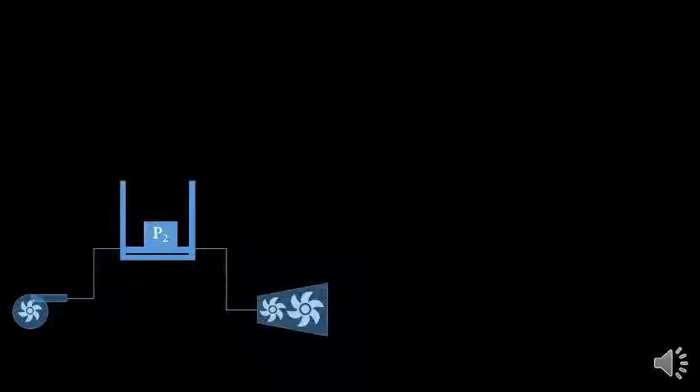Okay, dito meron tayong compressor. Ang compressor natin ay connected sa tinatawag nating combustion chamber kung saan ang pressure dito ay minimaintain natin at some pressure P2. At mula sa combustion chamber, ang hot gas or combustion gases at higher pressure ay ating gamitin upang itulak natin ang mga blades ng ating turbine, and then iikot ang ating turbine.

So mula sa compressor, hihigop tayo ng fresh atmospheric air. I-compress natin ito at higher pressure P2, and then dadalhin natin sa combustion chamber, at doon sa combustion chamber ito ay ating sunugin or initin, of course including with the fuel.

Pansinin natin na nilagyan natin dyan ng piston, ibig sabihin manatiling P2 ang pressure natin dyan, habang ang ating combustion gases ay ini-exhaust natin doon sa ating turbine. So itong mga high pressure gases na mula sa combustion chamber ay siyang maging dahilan sa pag-ikot ng ating turbine. And then ang ating mga exhaust gases ay ititatapon din natin sa surrounding or sa ating paligid.

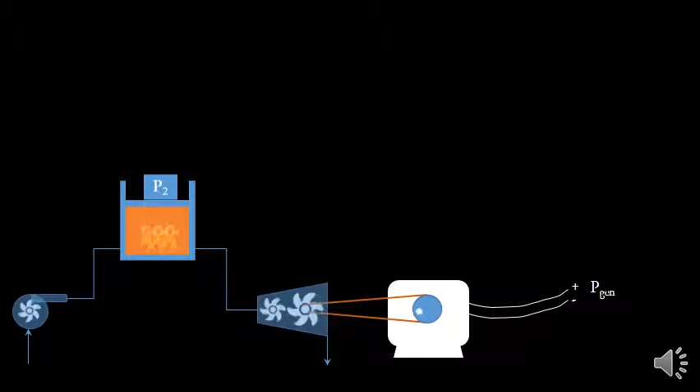Okay, so ang output ng ating turbine ay siyang pwede natin gamitin upang pagganahin ang ating generator. Samantala, ang ating compressor naman ay kukunin natin ang energy na pang-compress mula rin sa ating turbine.

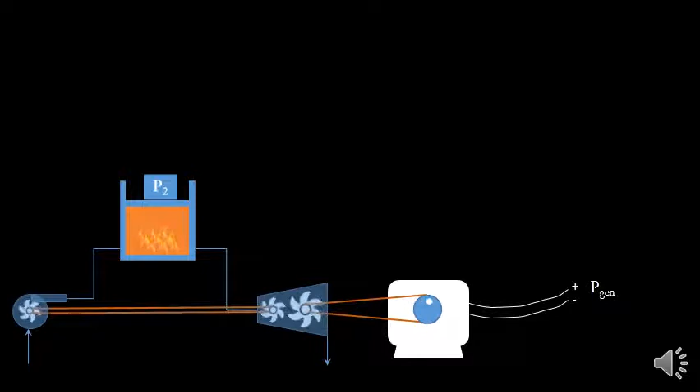Okay, so kapag ang state ng ating air before entering the compressor is state 1, and then ang state nito after the compressor is state 2, and then the state of the air after exiting the combustion chamber is 3, and the state of the flue gas or the exhaust gas is state 4.

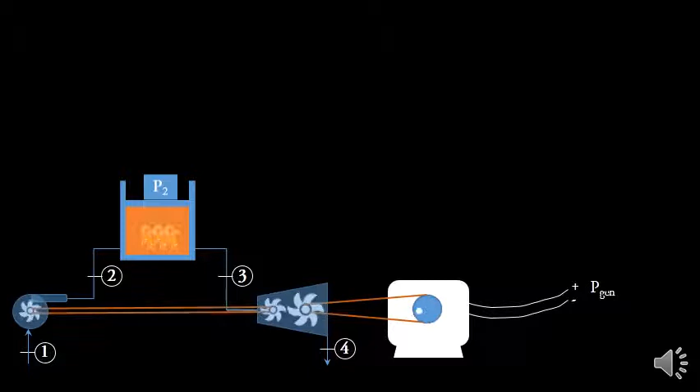So sa TS diagram, ito ang magiging itsura ng ating process. So in TS diagram, state 1 is here. I-compress natin yan sa compressor. Assuming the compressor is working on isentropic process, ibig sabihin constant entropy.

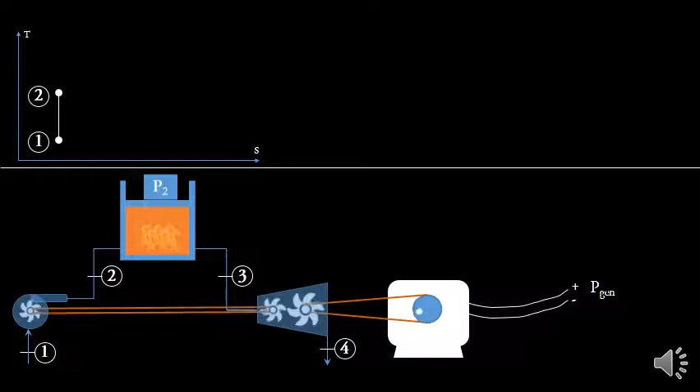Okay, ibig sabihin ng isentropic, ibig sabihin adiabatic ang process, no heat flow, and then it is ideal. So kinupress natin pataas na pressure, that is a constant entropy, meaning that is a vertical line, and then at point 2, mula sa point 2, inilagay natin ito sa combustion chamber at pressure P2 at sinunog natin doon or nilagyan natin ng heat.

So from point 2, ang pressure niya dyan is constant pressure hanggang nagiging point 3. So sa TS diagram, we have 2 and 3 connected by a constant pressure line P2. It is in here that we add heat to the air. And then from state 3 down to state 4, it expands to the turbine at constant entropy.

So our state 4 is here now after exiting the turbine. Okay, dahil ang ating exhaust gas ay tinapon natin sa atmosphere, ibig sabihin ang pressure final ng ating exhaust gas is atmospheric pressure, which is the same pressure of the atmosphere. So pwede natin i-connect ang ating point 1 and point 4 by an imaginary line representing the constant pressure P1.

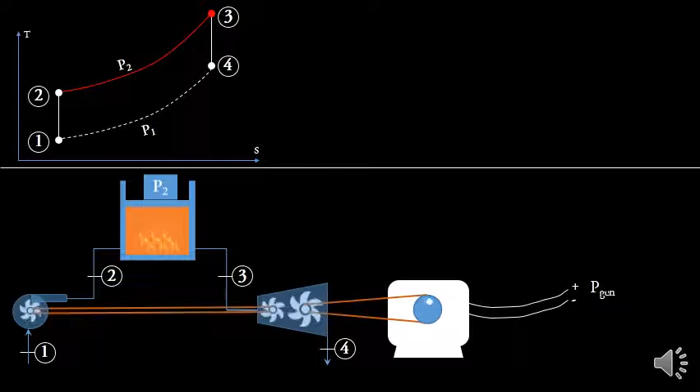So ano ang work done sa compressor? Okay, i-compute muna natin ano ang work dun sa compressor. The compressor works between states 1 and 2. Ang temperature sa point 2 is T2, temperature sa point 1 is T1. At ang total work done ng compressor natin is equal to mCp times T2 minus T1.

Okay, next is sa ating combustion chamber. Sa combustion chamber, meron tayong heat na dinagdag at constant pressure. So, mCp times ang change ng temperature between 2 and 3 is T3 minus T2. And then from 3 to 4, it is the work of the turbine, which is again between 3 and 4, mCp times T3 minus T4.

Okay, I suggest na kapag nagko-compute tayo ng work ng compressor, heat added, and work ng turbine, mas okay na i-express natin ito sa mga positive na value. Ibig kong sabihin, mas okay na ang ating mas mataas na temperature ay unahin natin isulat kasunod naman ng mas maliit na temperature para ito ay maging positive.

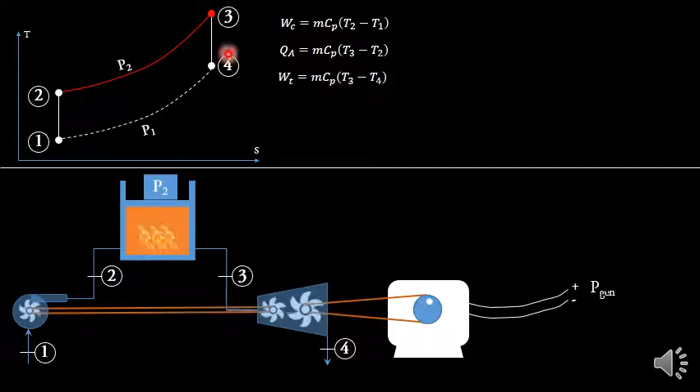Kagaya ng work ng compressor, ang work ng compressor ay nalagay natin T2 less T1. Samantala, sa work ng turbine naman ay biniliktad natin, T3 ang inuna natin and then T4. Although in ordering, supposed to be nauna ang T4. Pero ang gusto natin kasi mangyari, i-compute natin ang positive na work ng turbine. Para ito maging positive, dapat unahin ang T3 sapagkat ang T3 is higher than T4. According dito sa TS diagram natin, kita-kita naman na nasa taas na position ang 3 kaysa 4.

Okay, so kapag i-compute natin kung ano ang net work done natin is the work of the turbine less the work done that is imparted to the compressor. And then, para ma-compute natin ang efficiency, kung gaano nga ba ka-efficient ang ating turbine or ang ating power plant, we compute the work net and then we divide it by the heat added.

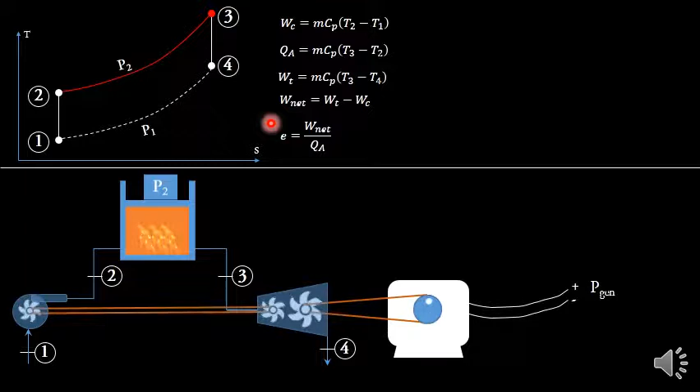Ang formula na ito ay universal or general dahil ginagamit natin yan kahit sa anong mga heat engine. So, base dito, makompute na natin kung ano ang specific formula para sa ating Brayton cycle. So, here,

pwede rin natin i-compute ang efficiency natin gamit ng formula na ito. So, 1 minus 1 over R sub P, where R sub P is the pressure ratio, K minus 1 over K. Where K, if the fluid is air, is 1.4.

And then, we compute the back work ratio. It is important to determine the back work ratio, kasi baka ang work ng compressor ay ganun din ang work ng turbine, so wala tayong net work output niyan, ibig sabihin useless ang plant natin. So, work of the compressor divided by the work of the turbine is called the back work ratio.

Parehas din ito sa back work ratio ng ating steam power plant. Kaya nga lang, sa Brayton or sa gas turbine, ang back work ratio ay hindi hamak na mas malaki kumpara sa back work ratio ng steam turbine. Sa steam power plant, ang back work ratio natin ay napakaliit, siguro less than 1%. Samantala sa ating gas turbine naman, ang back work ratio umaabot ng 50%, meaning kalahati talaga ng output ng ating gas turbine ay napupunta dun sa work ng ating compressor, as much as that amount.

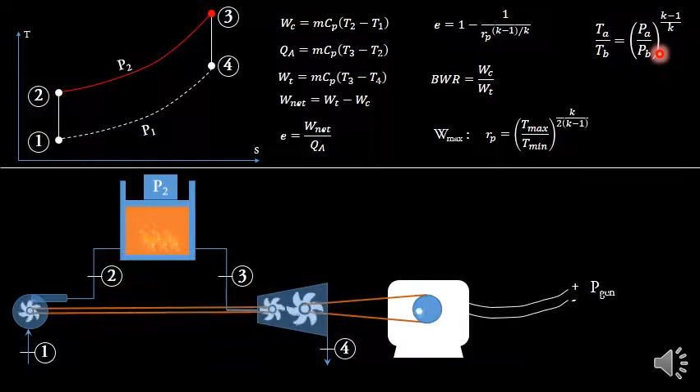And then, don't forget, dito sa ating mga processes, ito ang gagamitin natin na relation ng temperature and pressure. So, para sa isentropic process of compression, ito ang relation ng temperature natin. Okay, that is based on our thermodynamics.

Para makompute natin ang back work ratio, dapat natin munang alamin kung ano ang work ng turbine at ang work ng compressor, at ang ratio nila ay yun ang tinatawag natin na back work ratio. At state 1, ang temperature ng ating air dito and ang pressure ng ating air is that of the atmospheric air. Dito sa problem natin, ang pressure ng ating air is 100 kilopascals, samantala ang temperature is 300 Kelvin.

And then, ibinigay ang ating pressure ratio, which is 10. Ibig sabihin, bago pumasok sa compressor ang ating air, ang pressure nito ay 100. Dapat paglabas nito sa compressor, ang pressure nito is 10 times of the original pressure, so it must be 1,000. And then, the maximum temperature of the cycle is the temperature just before entering the turbine, or just after leaving the combustion chamber, which is 1,400.

Okay, so i-compute na natin ang work ng ating compressor, ang work ng ating turbine, at ang back work ratio. So kapag i-substitute natin ang work of compressor, MCp delta T, at ang work ng turbine, MCp delta T, common ang M at common din ang Cp, so ang magiging matira na lang ay ang mga temperatures natin.

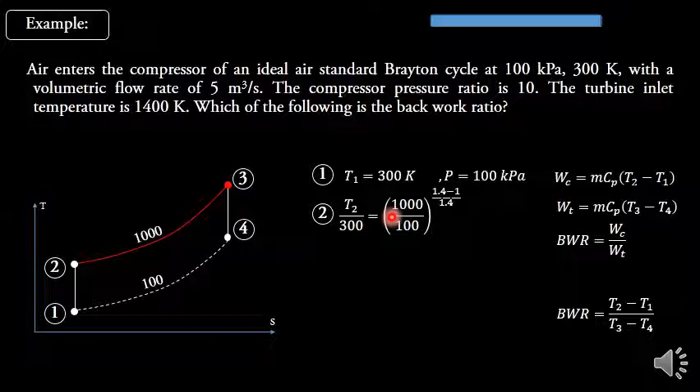Okay, kailan natin gagamitin ang arrangement na ito or yung baliktad na version? Kahit anong version ang gagamitin, ang resulta ng ating computation ay parehas. Pero ang maisuggest ko, kapag meron tayong variable, ilagay natin ito sa exponent. Kaya dito, inalagay natin ang variable sa exponent.

Okay, and that the corresponding pressure for T2 is 1,000. Bakit sa exponent natin ilagay? Dahil kapag ginamitan mo ito ng calculator, madaling i-compute ang T2. So i-compute mo ang value na yan, i-multiply mo ng 300, alam mo na ang T2. Kasi kapag nasa denominator ito, mag-perform ka pa ng cross multiplication or division. At isa pang rason, kapag gumamit ka ng shift-solve function ng calculator, mabilis masolve ang T2.

Pero kapag ang iyong T2 nasa ilalim, halimbawa sinulat mo ito as 300 over T2 equals 100 over 1,000 raised to that constant, kapag i-shift solve mo yan sa calculator, matatagalan ang output ng iyong calculator. Matagal, posible aabot ng minute, depende sa initial value ng calculator. Kaya, I suggest na kapag meron tayong variable na sinosolve gamit ang shift solve function sa calculator, ilagay ang variable sa numerator. Okay, from this equation, the only variable is T2, so we can solve it easily, and this is our T2.

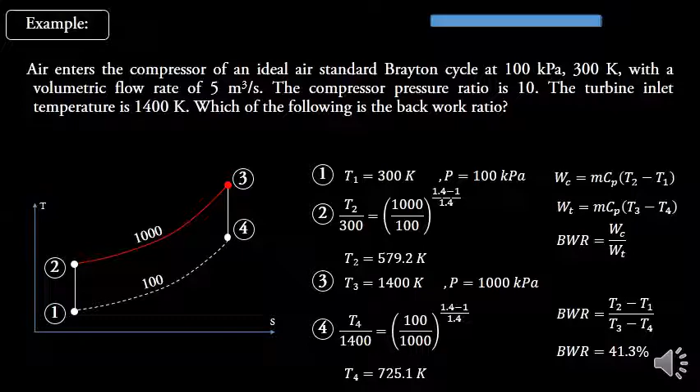So, 1,400 times that quantity. Masolve natin ang ating T4. Kumpleto na ang ating mga temperature, and then masubstitute na natin sa ating back work ratio formula, and our back work ratio is 41.3%.

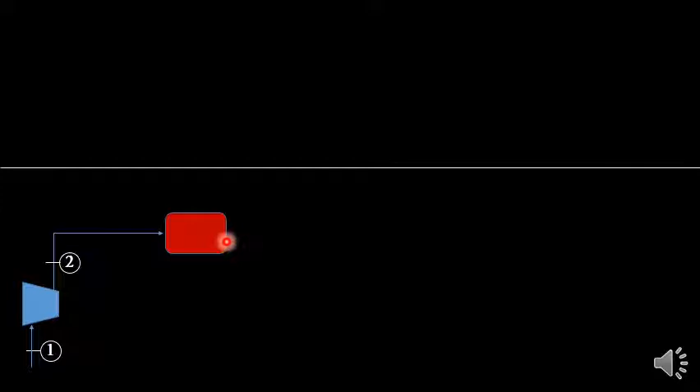Okay, dito naman, i-illustrate natin ang Brayton cycle with regeneration. Babaguhin lang natin konti ang ating diagram. Dito, meron tayong compressor. State 1, pumasok ang hangin. And then, paglabas sa compressor, mataas na ang pressure nito. And then, dinala natin sa combustion chamber. Pagdating sa combustion chamber, sinunog natin, ininit natin, at lumabas sa combustion chamber at pumasok sa ating turbine.

Dito sa ating turbine, ang ibang work ng ating turbine ay ginamit natin upang patakbuhin ang ating compressor. And then, itinapon natin ang ating gas sa atmosphere. Kaparehas lang ito ng original natin na illustration.

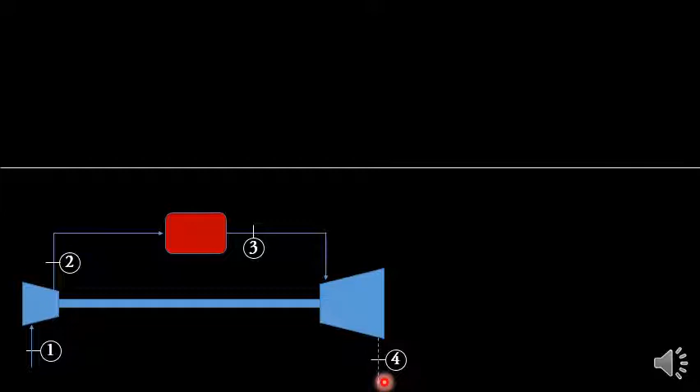Kapag titingnan natin ang TS diagram nito, ito ang kanyang hitsura kanina. Although makikita natin dito na straight ang line na iginuhit natin from 2 to 3. Actually, sa TS diagram, hindi ito dapat straight, naka-curve ito. Ginawa lamang natin itong straight upang hindi tayo mahirapan sa pag-drawing. So, naka-curve dapat ito, hindi ito straight. Ang straight lang dito is ang isentropic curve, itong 1 to 2 and 3 to 4.

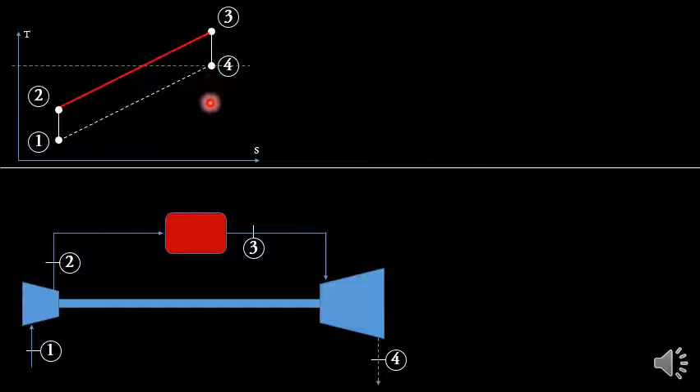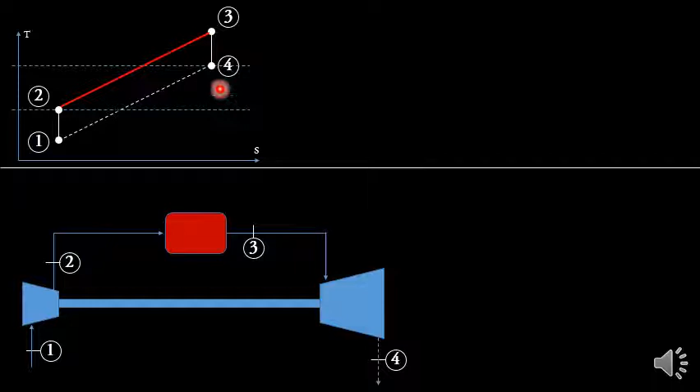Okay, pansinin natin ang TS diagram. Ang temperature T4, this one, which correspond to this temperature T4, ikumpara natin sa temperature T2. Saan ba ang mas mataas na temperature? Ang T4 or ang T2? Obviously, makikita natin ang T4 mas mataas kaysa T2 kasi according to the vertical axis, nasa mataas na posisyon ang point 4 kaysa point 2. Meaning, ang temperature ng exhaust gas natin mula sa turbine ay hindi hamak na mas malaki kumpara

sa temperature ng hangin nang lumabas ito sa compressor. Saan napupunta ang ating exhaust gas? Itinapon lang natin. Sayang, mas mataas ang temperature noon. Ibig sabihin, mayroon pang energy doon na pwede sana nating ilagay sa ating air.

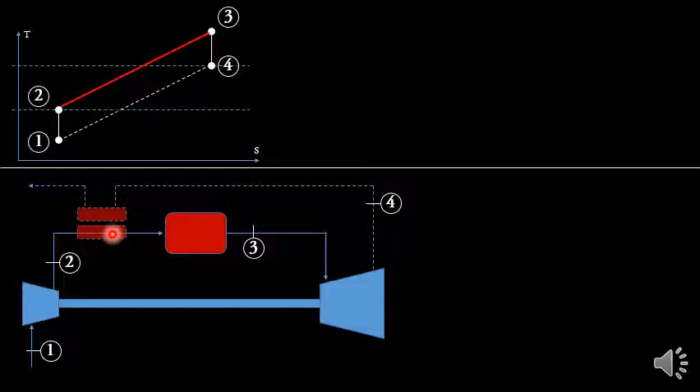At gaano nga ba kadami ang heat na pwedeng ibigay natin mula sa exhaust gas papunta sa ating air? Okay, makikita natin yan sa ating TS diagram. This is the maximum heat that can be regenerated. So mula dito hanggang ang temperature ng ating exhaust gas ay siyang equal na sa temperature ng ating compressed air.

Ibig sabihin, kapag dinaan natin dito sa ating compressed air, and then atin itong heat exchange, and then, siyempre, dahil nagkaroon ng heat exchange, bababa ang temperature ng ating exhaust gas hanggang sa pinakamababa na temperature na pwede niyang abutin, which is the temperature of the incoming compressed air. Ay siya na ang pinakamataas na energy na pwede nating ibigay sa compressed air.

Okay, pero in most cases, hindi yan nangyayari sapagkat talagang hindi natin naabot ang temperature ng compressed air ng exhaust gas natin. Siguro ang ating temperature nandyan lang. Okay. So sa paglabas dito ng ating exhaust gas, ang ibang heat ibinigay doon sa ating compressed gas, siyempre, tataas ang temperature ng ating compressed gas.

So, mula dito sa temperature na yan, tataas siya papunta dito. Samantala, ang temperature ng ating exhaust gas, which is, okay, mataas. Pagdating dito, bumaba ng temperature at this point. So, from 0.4 to 0.1. Okay, ang kabuoang energy mula sa 0.4 hanggang dito ay binigay natin doon sa compressed gas before ito pumasok sa combustion chamber.

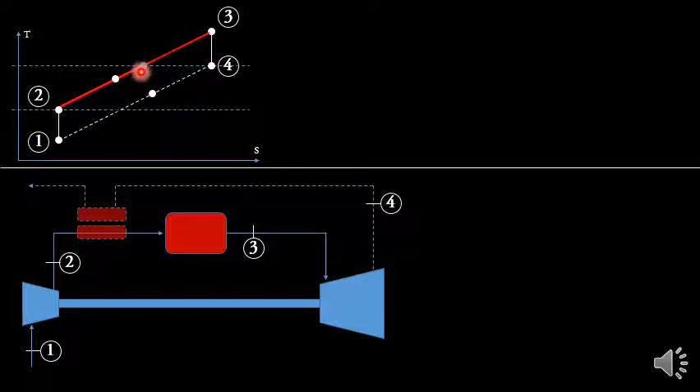Pero actually, hindi ito ang malaking energy na pwedeng i-absorb ng ating compressed air just before entering the combustion chamber, sapagkat pwedeng ito ang kabuang energy na yan ang pwede nitong i-absorb. Ito yung maximum na pwede niyang ma-absorb. That is, kung ang ating regenerator is 100% efficient. So kapag 100% efficient ang regenerator, ang buong heat na yan ay mapupunta doon sa ating compressed gas before entering the combustion chamber.

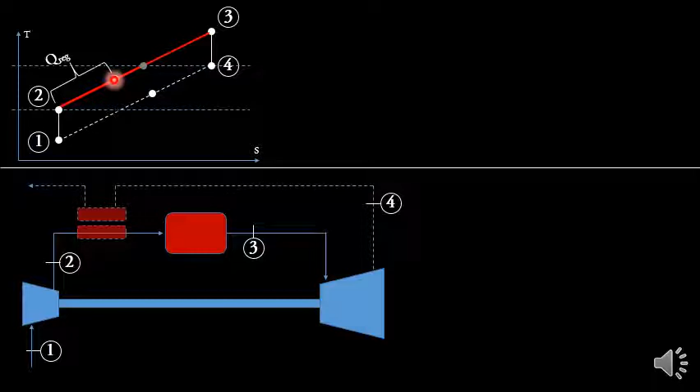Before that, let's identify the points. So the air enters here. This is the compressed gas exiting the compressor. It absorbed heat from the exhaust of our turbine, so its temperature increased. And this point is the point after exiting the regenerator.

From here, going to point 3, this is where the actual heat addition happens. But before that, again, point 6 is the temperature of the exhaust gas after exiting the regenerator, which is this point.

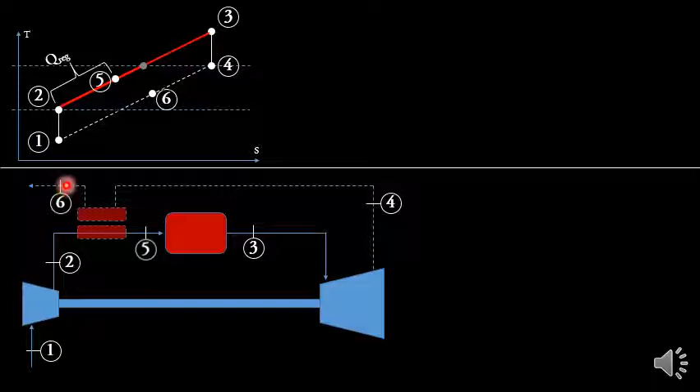This is the formula for our heat regenerated. The amount of heat recovered is equal to MCP times the temperature, T5 minus T2.

And then we have the maximum heat that we can recover, from this point up to this point. This is the highest amount we can recover, the entire length from this point up to this point, straight to the line T2. So our maximum recoverable energy from the turbine is MCP times T4 minus T2.

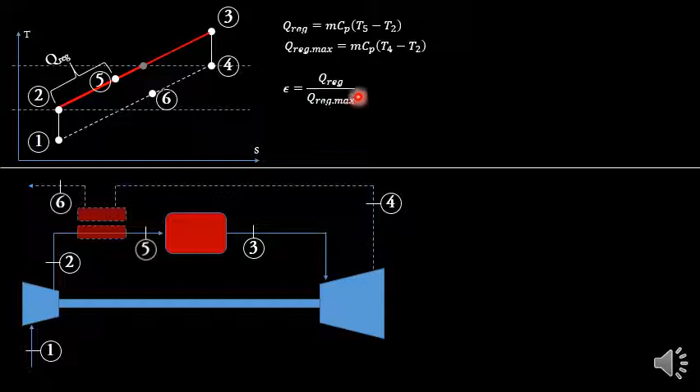This is what we call the effectiveness of the regenerator. How effective is the regenerator really? The regenerator is 100% effective if the heat we recover is equal to the maximum recoverable heat. But in our case, our Q-reg is small compared to our Q-reg max.

Again notice that the length from here to here is equal to that length, and to that length. When the efficiency of our regenerator is maximum, the entire length from here to here will also end up there, from that point up to that point. Substituting Q-reg and Q-reg max, we get T5 minus T2 divided by T4 minus T2.

Let's observe again this Q-reg max. Our formula is T4 minus T2. This temperature is equal to temperature T4, so that's also T4. Divide or subtract this temperature T2.

The actual heat added is from point 3 to point, or from 0.5 to 0.3, a shorter path now. This means we save energy with the same amount of work output. This is the formula for the heat added between 0.3 and 0.5. So the efficiency is now the same: work net, which is the work of the turbine less the work of the compressor, divided by the heat added.

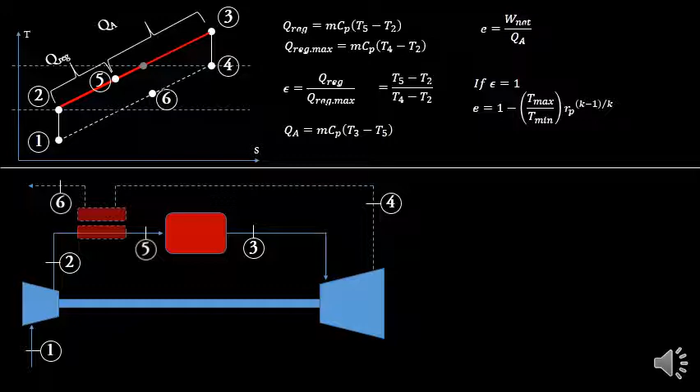If the regenerator is 100% effective, then our efficiency can also be computed using this formula. This formula can be used, or this one can be used when our regenerator is 100% effective. Or even if you don't use this, you can still use the other one even with 100% effective regenerator. That's still okay. This one is a direct formula for the special case when effectiveness equals 1.

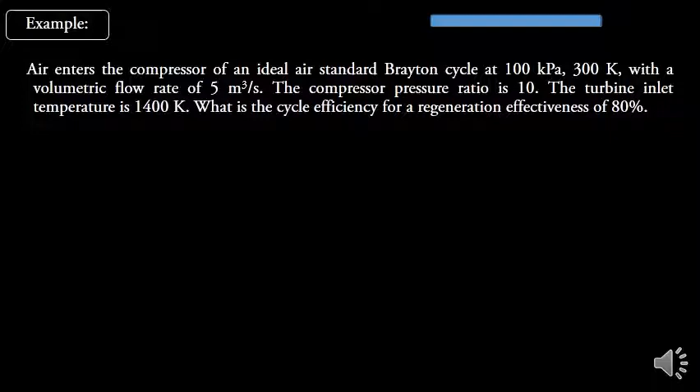This is the formula for our efficiency: work net over QA. And what is work net? Work of the turbine less the work of the compressor. And what is the work of the compressor? MCP times T2 minus T1. And the work of the turbine is this formula.

The heat added is equal to the change in temperature between 0.5 and 0.3 times MCP. When we substitute all of this into our equation, work net equals this MCP delta T less MCP delta T, then divide by MCP delta T. Since all the terms contain M and the specific heat CP, we can eliminate those, leaving only the temperatures.

Since we know the lower temperature and higher temperature, or the temperature limits, we can immediately identify those. Those are points 0.3 and 0.1, the temperature limits, which are 1,400 and 300.

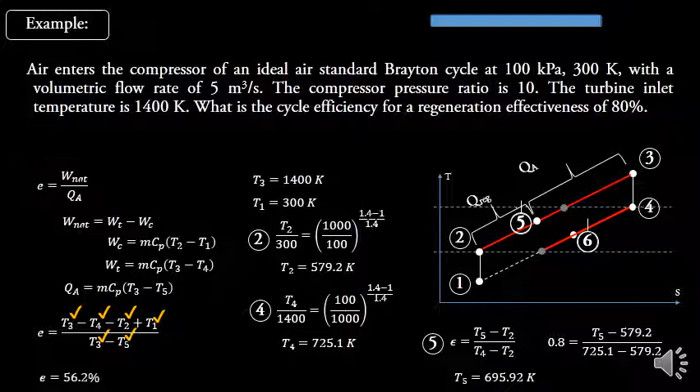Okay, so pupunta naman tayo sa cycle na tinatawag natin na Brayton cycle with regeneration. Maliban sa regeneration, meron pa itong intercooling and reheating.

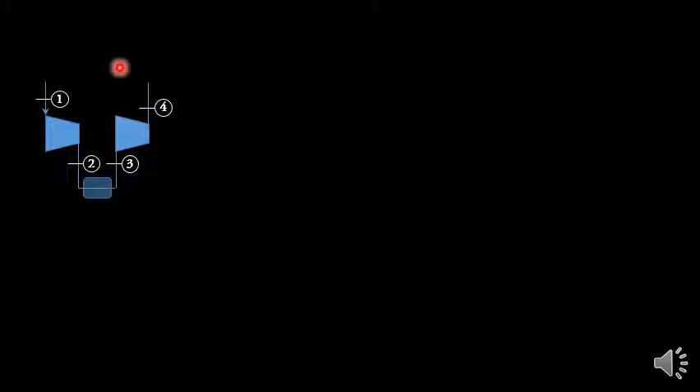Kinompress natin gamit ang isa pang stage ng compression. So, from 3 to 4, tumaas uli ang ating pressure. And then, dito na natin siya idaan sa regenerator just before entering the combustion chamber. Pagpasok sa combustion chamber, lumabas diyan at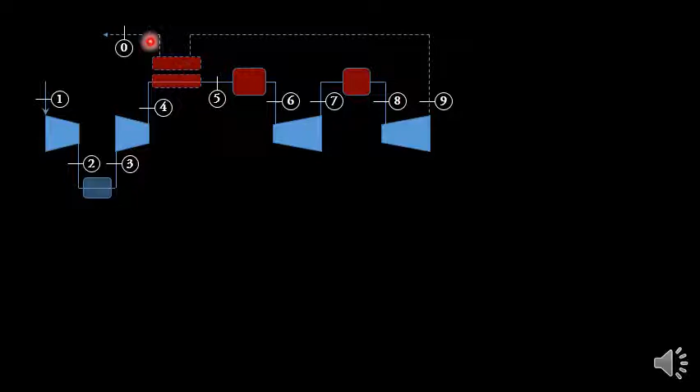So, pag tingnan natin, meron itong 10 na mga state points. And this is the state 0. And they are connected by the same shaft just to mean that the work of the compressors are taken from the work of the turbine. And this is our TS diagram.

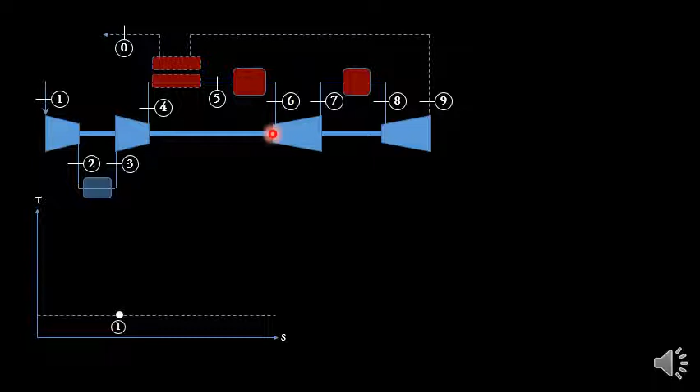Una, pumasok ang hangin. The state of the air is atmospheric. The pressure is 100 maybe kilopascals and the temperature is at 300 Kelvin maybe. And then, kinompress natin ito at higher pressure, P at pressure 2. And then, dahil tumaas ang temperature, atin itong i-cool down at constant pressure. So, baba siya dyan sa 0.3 at constant pressure.

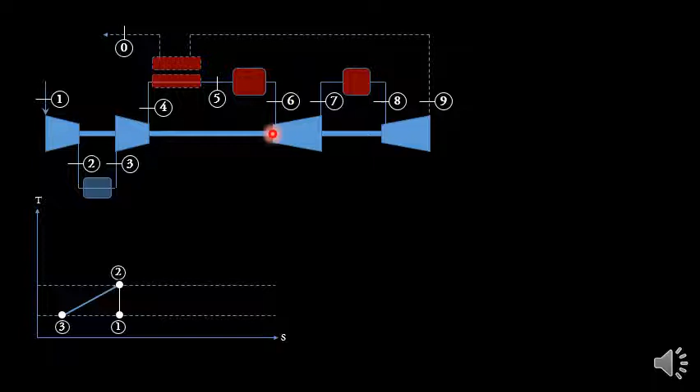From 0.3 naman, atin naman itong i-compress isentropically. So, 0.4. And then, sa 0.4, mula sa 0.4, dadaan muna siya sa ating regenerator. Meaning, bahagya muna ang tataas ang kanyang temperature from 0.4 to 0.5. And then, finally, this is now temperature T5.

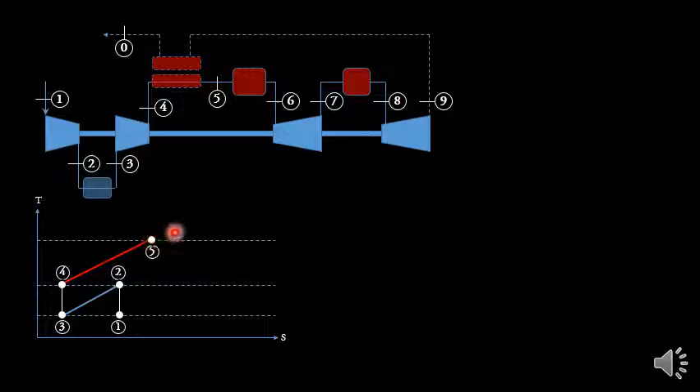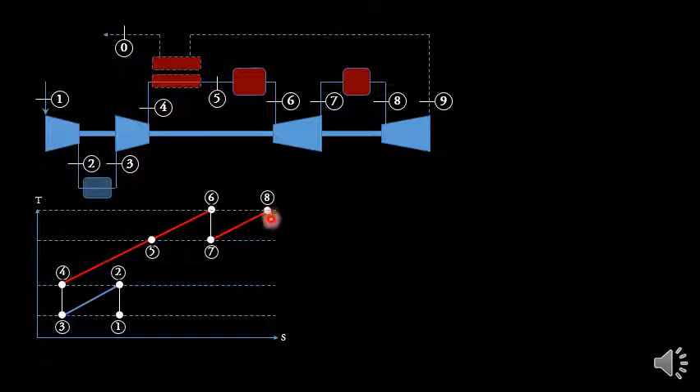And then, papasok na siya doon sa ating combustion chamber kung saan tayo nagkaroon ng heat addition. Ayan, dyan. From 0.6, i-expand ito sa turbine. Ibig sabihin, bababa tayo, i-expand sa turbine, bababa ang temperature to 0.7. Bumaba ang temperature sa 0.7, ininit muli natin. Tataas naman muli ang ating temperature dyan. At constant pressure again. Tumaas muli ang temperature, siguro equal din sa original temperature ng T6.

And then, i-expand naman natin muli ito sa ating turbine. And then from this point, idadaan naman natin ito sa ating regenerator. So, ang ating regenerator, let's just assume, dahil sa complication ng ating diagram or ng cycle na ito, mas maigi na i-assume na lang natin na 100% ang ating regenerate na energy para hindi masyadong complicated ang ating computation. Anyway, sa actual, hindi naman talaga actually 100%.

Okay? So, nandito ang ating heat regenerated. Ang ating heat na regenerated, this is already the maximum in this illustration. Pero pwedeng nandito lang yan ang 0.5 natin, mas mababa dyan. Para hindi masyadong komplikado ang ating diagram, nilagay na lang natin dyan. Minaximize na lang natin ang heat na na-regenerate.

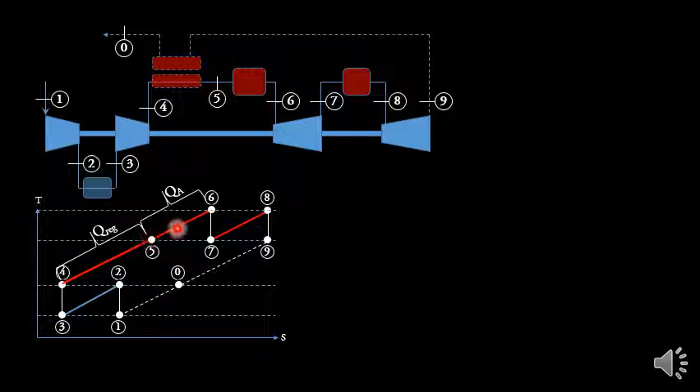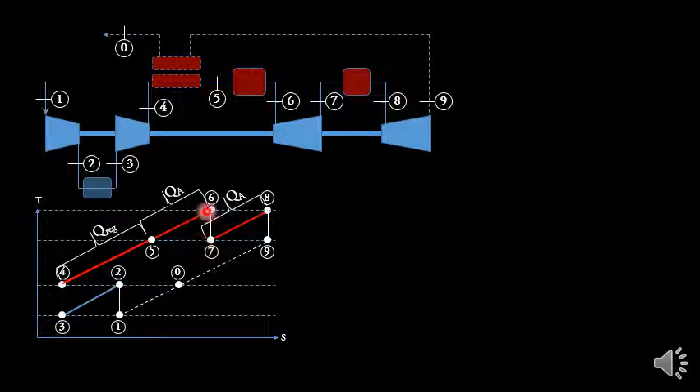And then, dito sa 0.5 at saka 0.6, dito tayo nagkaroon ng heat addition sa combustion chamber. That is our QA. Ano ang formula ng QA? mCp delta T, which is the temperature between 6 and 5. Pero dito sa kabila, meron din tayong another heat addition between 7 and 8. Ayan. And what is the heat added? mCp delta T. The delta T between 8 and 7 is the same delta T between 6 and 5. Meaning, ang heat added natin, pwede natin sabihin heat added from 5 to 6 times 2. Sapagkat equal lang naman ito na energy dito sa 7 and 8.

And the work of the compressor. Dito, meron tayong dalawang compressor. Ang work ng compressor is mCp delta T. Since the delta T between 1 and 2 is just the same delta T between 3 and 4, sabihin natin ito na lang ang i-compute natin na energy, i-times 2 na lang natin. That will be the work of the two compressors.

And then, the work of the turbines. The same din. mCp delta T between 8 and 9 is the same delta T between 6 and 7. So, it means pwede natin i-compute ang mCp delta T between 6 and 7 and we'll just multiply it by 2 to get the work of the turbine.

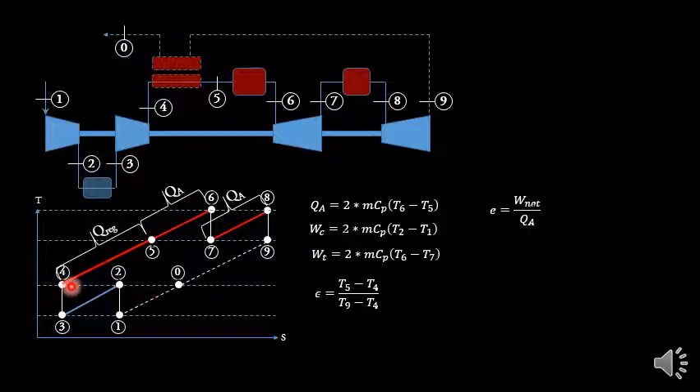And this will be the formula for the effectiveness. The same principle again. T5, assuming that T5 is not equal to T7 or T9, sabihin natin nandito yun, minus T4, the temperature just before exiting the final compressor, divided by the maximum, which is from this point up to that point, which is this temperature, equal to T9 here, T9 less the minimum temperature, which is T4. And of course the efficiency is the same.

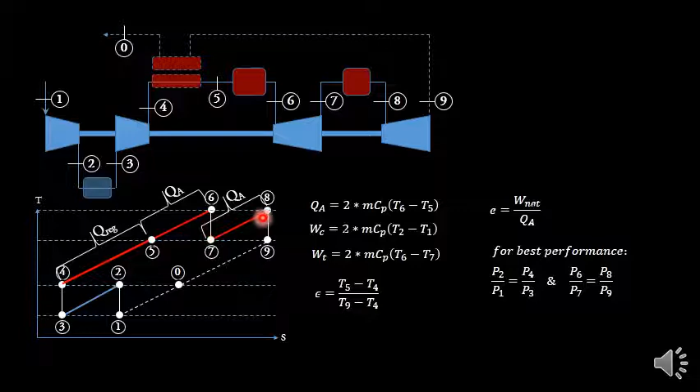And for best performance, dapat ang P2 over P1 equal sa P4 over P3. Pansin natin, meron tayo ditong tatlong mga pressures. And ang P6 over P7 is equal to P8 over P9. Okay, let's identify them. P2 is that point, divided by P1 is that point. Must be equal to P4 over P3. And then, P6 over P7 is equal to P8 over P9.

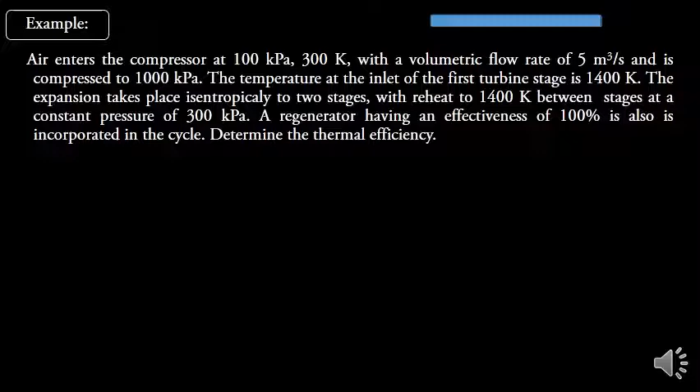What is the thermal efficiency? This is the TS diagram of this cycle. Pero dito sa ating illustration, isang compressor lang ang ating i-consider. Air enters the compressor at 100 kilopascal, 300 Kelvin, that is atmospheric. So, babaguhin natin ang ating TS diagram. So, from point 1 to point 2, ang point 2 natin is at the highest pressure. So, wala tayong intercooler, tatanggalin natin yan. Didiretso tayo sa itaas at doon na ang ating final pressure.

Okay. Ano ang kaibahan kapag isang compressor lang or dalawang compressor? Ayan, pwede naman pala isang compressor lang. Bakit pa tayo gumamit ng dalawa pang compressor? Ma-discuss natin dyan doon sa fluid, sa ating compressors na topic. Just an advanced information, kapag meron tayong dalawang compressor, mas maliit ang work done ng dalawang compressor kaysa isang compressor lang. Kaya makasave ng energy kapag dalawang compressors. Okay, here, isang compressor lang, sinacrifice natin ang ating pera. Ibig sabihin, mataas ang ating consumption sa compressor. That's okay.

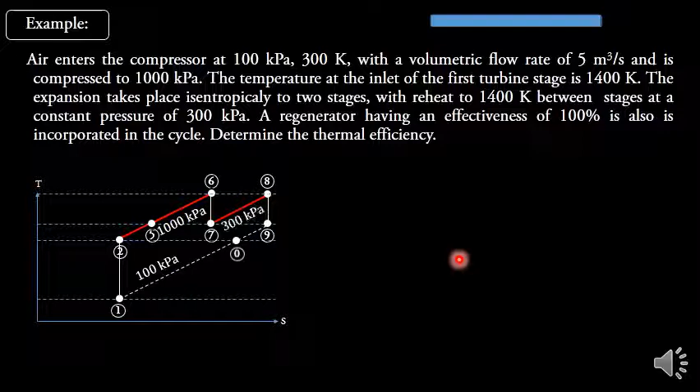So, babago rin ang ating minimum temperature ng ating regenerator. Kanina, itong point 0 natin, mababa, ngayon tataas na ito. Dapat kung ano ang pinakamababa or pinakamataas na temperature ng air nang lumabas ito sa compressor, ay siya na dapat ang pinakamababa na temperature ng ating exhaust gas paglabas nito sa ating regenerator. 100 kilopascal dyan, this is 1,000 kilopascal at 300 naman sa reheating. Ito naman ang na-regenerate natin na energy. Ito naman ang heat na atin na-add. And then, ang temperature limits natin, 300 and 1,400 Kelvin.

Ang work done ng compressor is from point 1 to point 2, isang compressor lang. At ang work ng turbine, dalawa: 6 to 7 and 8 to 9. And this is our efficiency. Compute natin ang net work, compute natin ang Q added. Work net is the work of the turbine less the work of the compressor. And then, this is the formula for the work of the turbine. MCP, ang gamit natin na stage is 6 and 7. And the work of the compressor is MCP, T2 minus T1.

While the heat added is from point 5 to point 6, so we have T6 less T5. So kapag ilagay natin yan sa equation, ma-eliminate lahat na M at ang lahat na CP. Ito na yung matitira sa ating equation. Lahat na temperature limits, defined. Maximum temperature is T6. And then minimum temperature is T1.

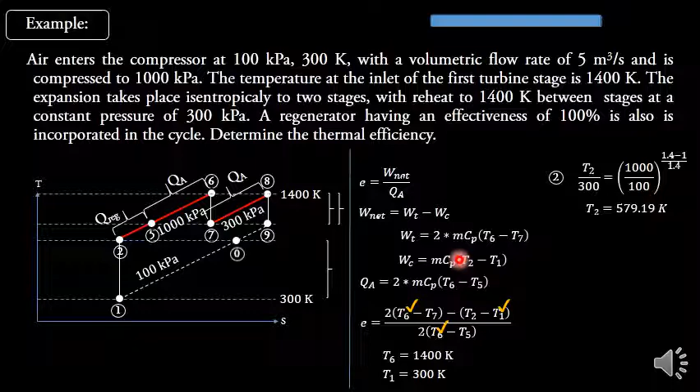Next, i-identify natin kung ano ang T2. We'll use the pressure and temperature relation for T2. Yan ang value ng ating mga temperature limits. Now for T2, we use temperature relation and pressure and temperature relation, and that is our T2. Next, we proceed to point. Which point? Okay, T2 is now defined.

We proceed to T7. Okay, for temperature 7, that is between 6 and 7 ang gamitin natin. Ang temperature sa 7 is unknown, and ang temperature sa 6 is 1,400. And the pressure at T7 is 300. The pressure at 6 is 1,000. So we can now compute our T7, and that is our value. So T7 is now defined.

Finally is for temperature 5, which is the temperature after exiting the regenerator. Since the device that is involved in here is a regenerator, then for T5 we will use the regenerator equation of effectiveness. So here we have T2, define ang T2, define rin ang ating... okay, meron tayong T2 and... okay. Pero alam natin na kapag 100% efficient, ibig sabihin ang temperature T5 natin equal niya sa T9 equal sa T7.

Okay, tingnan natin dito sa diagram. Ang ating point 5 is nandito. Ang temperature niyan ay equal din sa temperature ng exhaust gas sa turbine just after exiting the turbine, which is equal to temperature 7 here. So, ang T5 natin ay siyang temperature T7 natin dahil meron na tayong T7. Ang T5 natin is T7. Okay? So, everything is already there. So, we can now compute the efficiency.

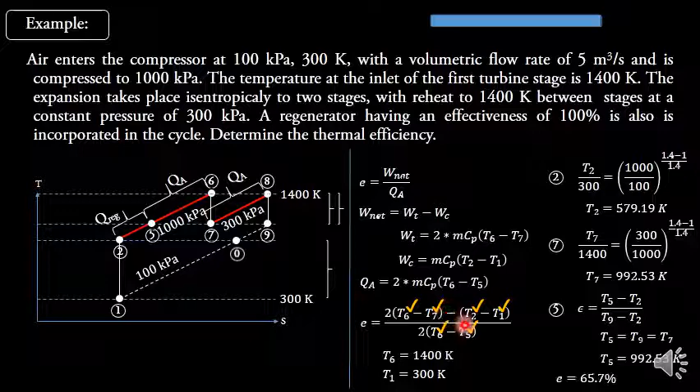Ang ginagamit sa mga jet propulsion ay katumbas ng cycle ng Brayton, medyo meron lang kaunting modification.

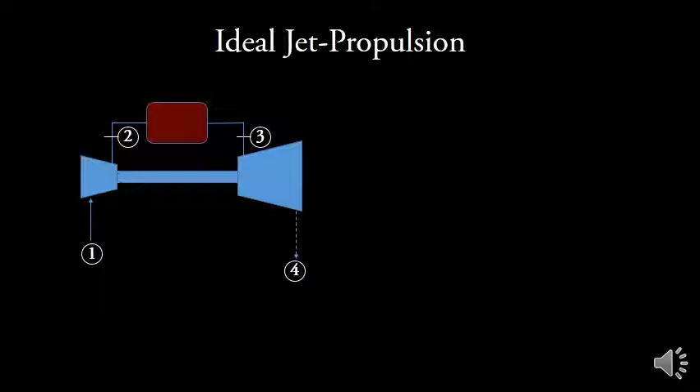Halimbawa, kagaya ng propulsion sa ating mga jet o sa mga airplane. Una, papasok ang ating hangin sa state 1, doon sa compressor. And then, kaagad meron ng combustion chamber dito. Nandito ang combustion chamber natin. And then, nandito na kaagad ang ating turbine, so i-expand ito sa ating turbine. And then, meron na tayong dinagdag dito na nozzle.

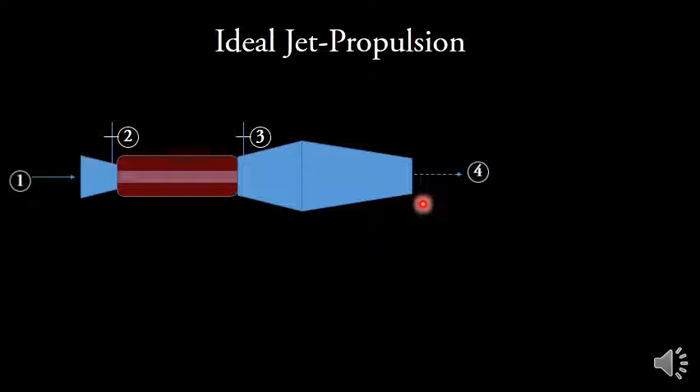Ang purpose ng nozzle, para paglabas dito ng ating exhaust gas sa ating nozzle, mabilis ang kanyang velocity. Siya ang magkaroon ng force na itulak ang ating engine as a whole, yung propulsion. Ang thrust na ma-generate natin dito will depend on the velocity of the gas exiting and the velocity of the gas entering here, which is equal to mass flow rate times the difference in the velocity at the exit less the velocity of the inlet.

Kapag still air naman, halimbawa yung isang jet plane tumatakbo sa still air, ang velocity ng jet ay siya ring velocity ng hangin na pumapasok sa ating compressor. Ibig sabihin, ang velocity in natin is equal to the velocity of the aircraft.

And then, the propulsion power is equal to, since force times velocity is equal to power, then that is our formula for the propulsive power of our aircraft. And this is our efficiency: it is the power of the aircraft divided by the heat added to the aircraft.

Okay, pagpansinin natin, ang efficiency natin para sa ating jet propulsion ay hindi na ito nag-involve ng work ng compressor. Bakit kaya?

Kasi ang purpose ng mga engine na ito sa ating mga aircraft ay hindi para tayo makapag-generate ng electricity, like say electricity sa household natin o i-supply sa community. Lumilipad lang ang ating airplane. Ang purpose ng ating Brayton cycle sa airplane ay just for the plane to mobilize, para lang ito makatakbo o makalipad. Ibig sabihin, ang lahat ng energy ng ating turbine ay ginamit natin para patakbuhin ang compressor. Meaning wala tayong net energy output, maliban lang sa kunting electricity na kinuha natin para pailaw sa loob ng eroplano. Pero theoretically, lahat talaga ng energy mula sa turbine ay ginamit natin upang patakbuhin ang ating compressor.

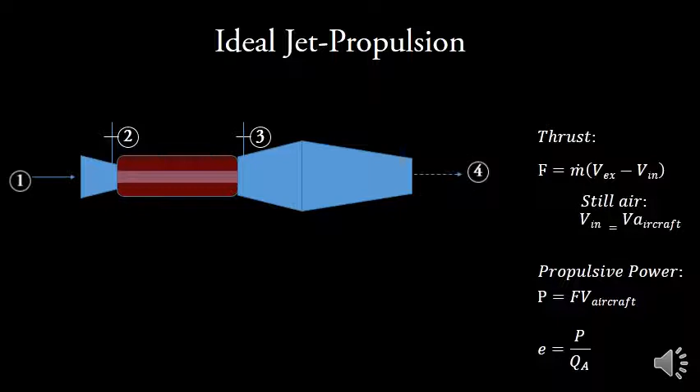So kapag ibase natin doon sa energy output ng ating turbine, zero efficiency talaga ang ating Brayton cycle sa mga aircraft. Pero sapagkat hindi naman electricity o energy output ang goal natin, ito yung power of the aircraft o ang propulsive power, meaning that is the output. So, efficiency natin will be based on the output of the aircraft, which is its power to move, which is force times the velocity of the aircraft, divide by the heat power, which is the fuel that is burned. So, we have E is equal to P over QA.

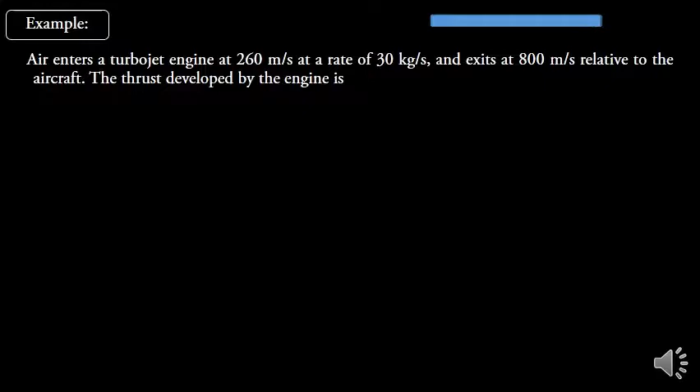Okay, so what is the thrust developed by the engine? Ito yung formula natin. Meron tayong velocity, merong mass flow rate which is 30 kg per second, velocity at the exit of the turbine 800, and the velocity of the air entering the turbine is 260. It is very straightforward, we can calculate the thrust, which is 16,200 Newton per meter square. So, that is 16 kilonewton.

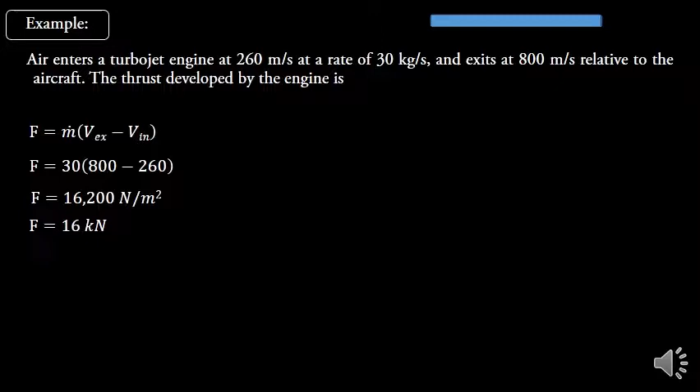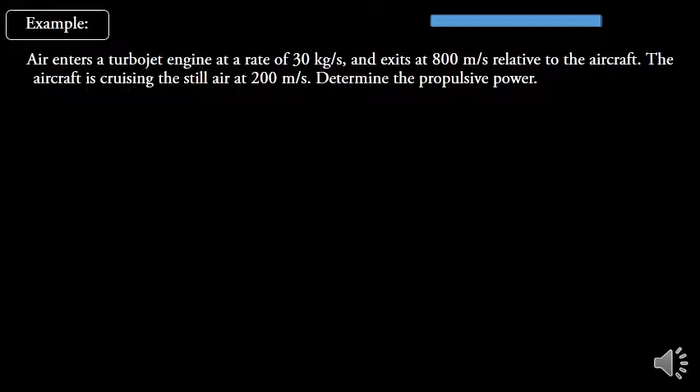Okay, so to determine the propulsive power, first we need to determine the thrust of the aircraft. And this is the formula for the thrust. And then, kapag nakalculate na natin ang thrust, we will determine the velocity of the aircraft. Una, identify natin kung ano ang velocity of the exit, it is given 800. First is the velocity inlet. Okay, the aircraft is cruising the still air at 200 meters per second.

Ibig sabihin, ang ating hangin hindi gumagalaw, it is in steady state. So, pagtakbo doon ng airplane natin sa itaas, sa himpapawid, ang velocity ng hangin na pumapasok sa aircraft ay equal sa velocity ng aircraft, which is 200 meter per second. The exit velocity is 800 meter per second. All of these velocities must be measured relative to the aircraft. So, ang velocity ng still air, zero of course, relative to the ground. But relative to the aircraft, because the aircraft is moving at 200 meter per second, then the velocity of the air entering the aircraft compressor is 200, the same as its velocity. And the mass flow rate is 30. So, makompute natin ang thrust natin, which is equal to 18 kilonewton.

Okay, to determine the propulsive power, we multiplied the thrust by the velocity of the aircraft, which is of course 200. So, the propulsive power is 3,600 kilowatts.